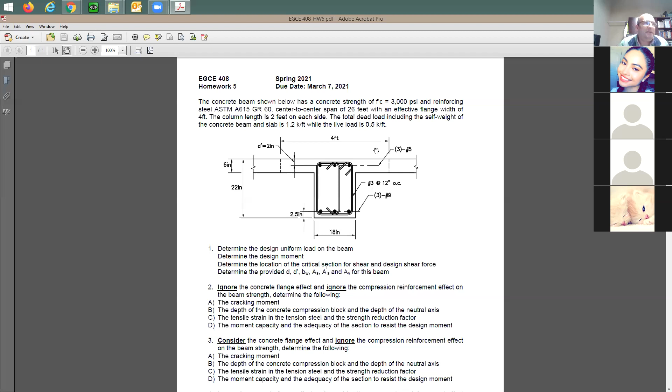So you have given a beam, with some information about it. You have the concrete strength, and the reinforcing grade, which means Fy is going to be 60. You have center to center span, and then they say effective flange width is going to be 4 feet. So my understanding is this is going to be like a T section with 4 feet flange. I know the slab is going to be extended, it's going to be 6 inch thick, but I'm going to consider only 4 feet for the flange width.

It says the column length is 2 feet on each side. Now this reminds me of the shear slide set, so let me put it on. This could be helpful to understand what this is about.

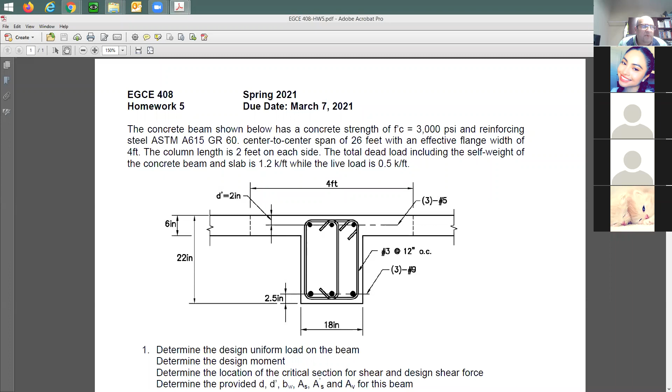You guys know if I just said the span is 26, it's going to be center to center, not the clear span. Just to clarify here, clear span versus total span—you guys have seen this.

So it's true that shear design itself won't be on the exam, but you need to understand this. You need to understand that the clear span is from face of column to face of column. The center line to center line span is from center of support to center of support. Are we clear on this? Yes? Okay, good.

So when you do the moment diagram, when you do the shear diagram, you do it for the center to center span. But when you compute the shear demand, you take it at the distance from face of support of the clear span.

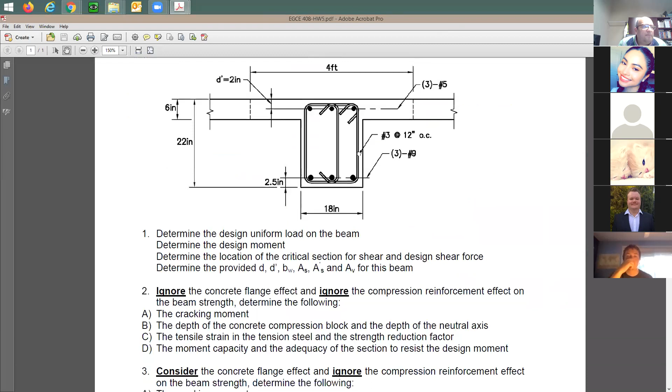So the thing I'm going to take from the shear design is the following item. For this problem, it says determine the design uniform load. What's the design uniform load? Is this dead load or live load, or W ultimate, which one? Dead load? Just dead load? Is it design load? That'd be off, isn't it? This is going to be the ultimate load, correct? Yes, ultimate load is the same as design load, same as demand.

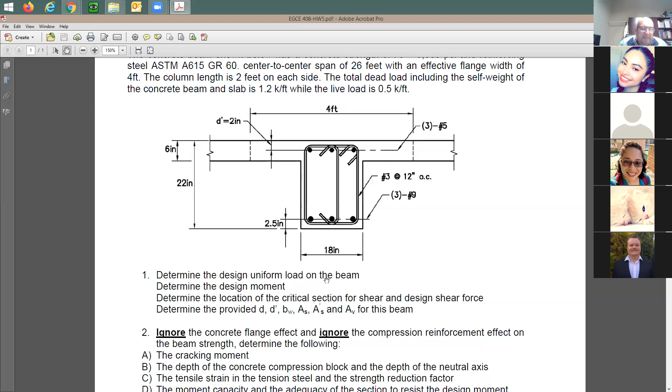So I'm going to put this here. So I'm going to say this is going to be W ultimate, which is the same as design load, which is the same as ultimate load.

How many equations do I need when it comes to load combinations? I'm going to say when I have dead load and live load, because it says here dead load including the self weight, which means do not redo the self weight. If I say total load including the self weight, do not redo it—it's already included. Unless I say dead load does not include the self weight, in which case you need to calculate it.

Just the live load first, two—oh sorry, just the first two load combinations typically. Yeah, exactly: 1.4 dead versus 1.2 dead plus 1.6 live. This is what you need to consider.

Where do you get the dead load and live load from? I'm going to say from here, it's going to be given to you. Do you need to do the self weight of the beam in this homework? No, you don't need to. But if I said total dead load excluding the self weight of the concrete beam and the slab, it means you need to figure out the weight of this concrete element. If I said including, you don't need to.

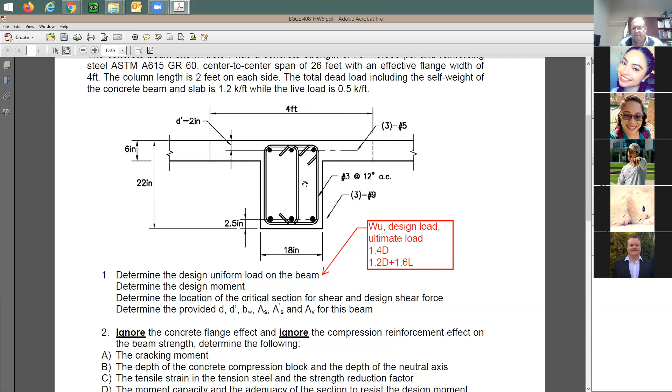Here's the first item. How about the design moment? Is this a simply supported beam or a continuous beam?

Continuous. How do you know it's continuous? The diagram of the T-beam that has that. Which diagram? This section of the T-beam? I'm talking about this beam itself. It goes from one column to another column, right? So when I draw this, I'm not drawing the slab, I'm drawing this beam. So the center line of this beam is going to be along this way, right? Here's one support, and here's the other support.

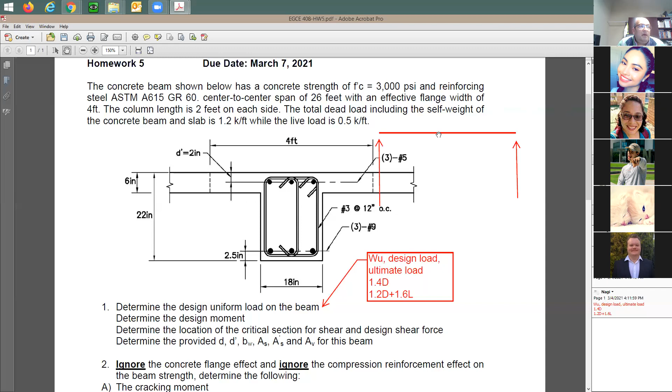This is what you call a simply supported beam. Unless, it says here's going to be 26 feet for the span, which means from here to there is going to be 26 feet.

Unless I come here and say it's going to be a continuous beam, and then I give you more than one support, it means it's going to be continuous, and then you need to use the moment diagram. Does it say here's going to be continuous? Is there any referencing to the term continuous, or is there none? No. So it's going to be simply supported.

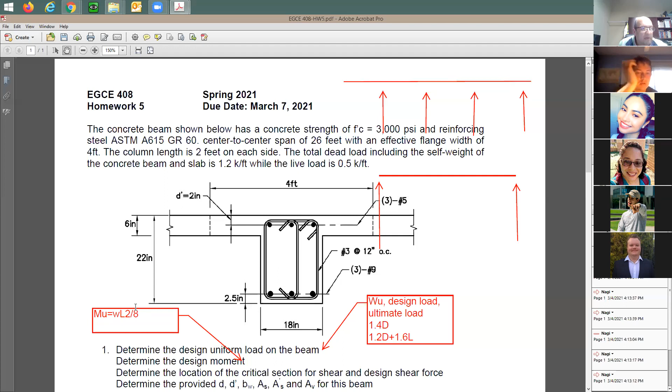Do you know the equation for the moment for the simply supported beam? How much is going to be the maximum moment here? Anyone know this? Are you talking about WL squared over 8? Yeah. Okay good, you're done here with the design moment, which is also called the ultimate moment, or the moment demand.

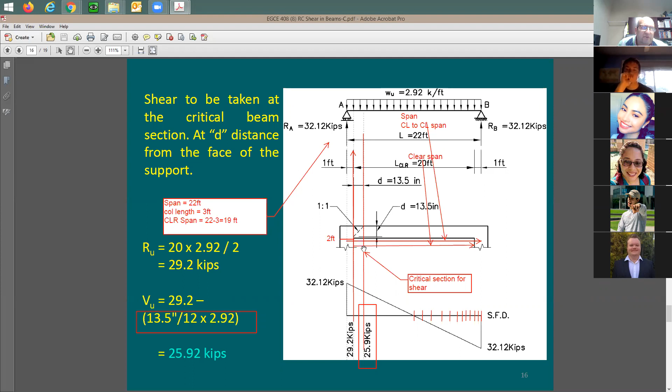How about the location for the critical section for shear and the design shear force? What is that about? The only thing I'm going to be asking about is two things from the shear slide set. How would you find out this design shear? You guys know how to do this? This is going to be structure analysis, pure structure analysis, which means you need to find out the clear span, do the moment diagram, do the shear diagram, find out the moment at the critical section for shear. So you need to indicate where that critical section of shear is and how much is the design shear force, which means V sub U.

Can you find out the depth? Can someone tell me the depth when you have positive moment? How much is the depth here? 19.5. Okay, did you do the bar diameter and the tie size and things like this, or you don't need to? No, it already gives us 2.5. Okay good, so it's going to be from here to there, right?

Okay good, how about BW and D prime? What is D prime? How much is D prime? 2 inches? 2.5. Yeah, it's right there. I mean, this is here. The first problem is going to be so simple. This is basic information, basic knowledge. If you cannot read this problem, if you cannot understand the given information, you're not going to be performing here. So this is like the basic thing.

How about BW? Where's the width of the beam? 18 inches? 18, 4 feet or 18 inch? 18, 18 inch, okay. How about AS? Is it the top or bottom reinforcing? Is it 3? Bottom, bottom. The bottom, 3 times A sub number 9, for number 9. Okay, how about AS prime? 3 times number 5, you need to find out the cross-section area for number 5, which is 0.31, right?

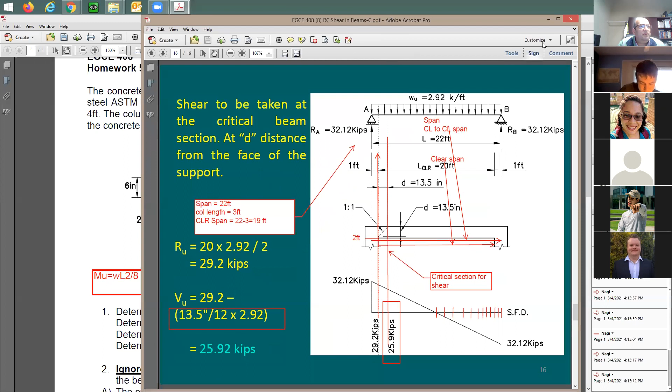How about AV? We discussed this AV in detail here. We talked about it enough times, I've been asked a question about it, I repeated a couple times. You remember this AV? We're going to do here a cut through the ties. So let me do here a cut through the ties. How many ties is the cut through? 3. 3. How about cross-section area for number 3? It's 0.11 times 3, and with that you are going to have your AV.

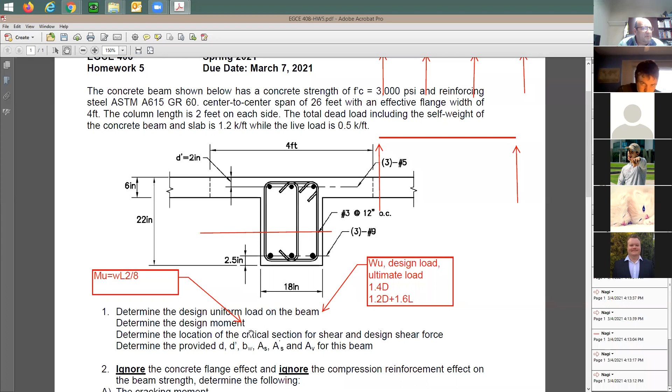All right, done. Problem number 2. You got to be careful here, very careful. It says ignore the concrete flange effect. What does it mean by ignore the concrete flange effect? It means consider your beam to be like this, don't worry about the flange, don't consider it in your analysis. Just take this piece and the reinforcing and start to do your business. It also says ignore the compression reinforcing, which means just ignore this 3 number 5. They're not there.

And then solve the problem. What does it mean, find out the cracking moment? We have done the cracking moment before many times. Does it mean that you need to do it with the flexure formula or with the force method?

Through the flexure formula. Why? We're looking at the behavior of concrete. So why not the force, the couple method?

Which one is easier for you? The flexure formula, right, Sarah? All right, if this is faster, just do it, because I did not specify here which method to use. So it's gonna be up to you. If you want to do the force method, you do it, or the couple method, you do it. If you'd like to do the flexure formula, you do it. It's gonna be up to you. If I'm not specific here on which method, just do the easier method for you.

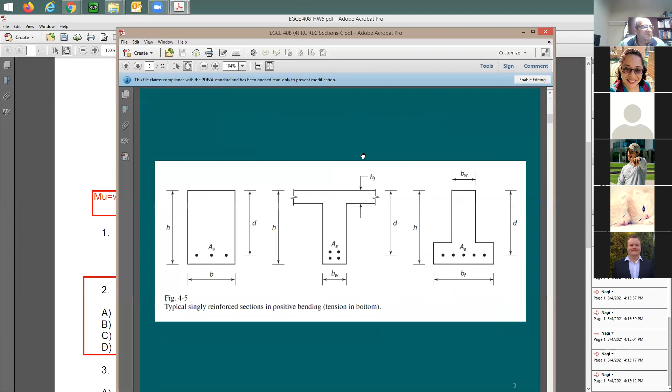We'll define this. Yes, okay, let's go here to the rectangular section, design and analysis. And this gives you the one. Yes, okay, this gives you this section here. Just use this formula. You want good examples right here. Rectangular section, compression reinforcing is not used. You can say slide set number 4.

So slide set number 4 is going to cover this problem. Any questions? No. Right, number 3. It says here, consider the concrete flange effect.

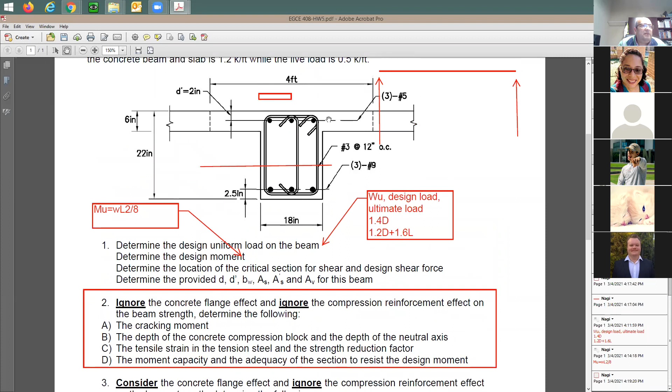What does it mean by that? It means treat this beam now as a T section and don't worry about the compression reinforcing. It says, consider the concrete flange effect, which means treat this as a T beam and ignore the compression reinforcement. No compression steel here. Don't take it into account.

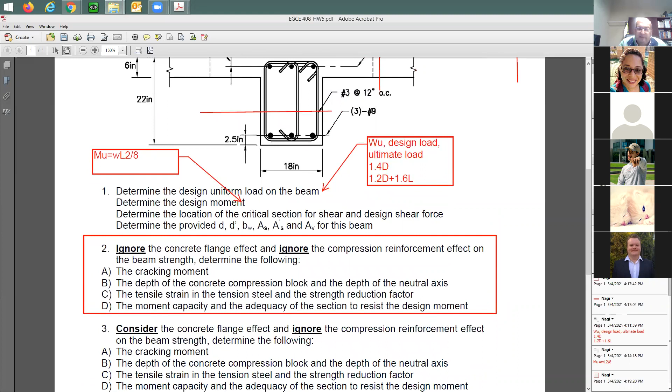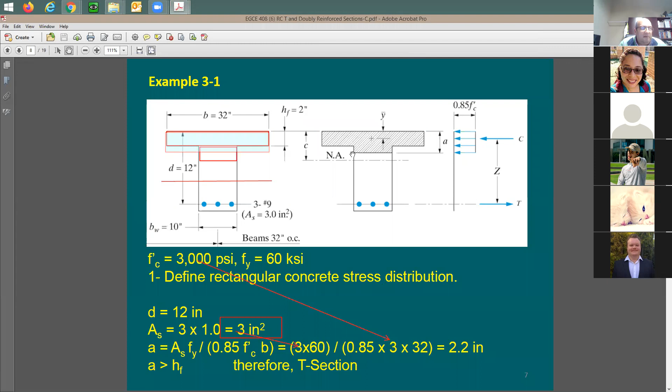I'm going to say, where should I go? Which slide set is this? Let me look at this slide set. So, okay, yeah, this slide is example 3.1. Exactly. This example 3.1, slide set number 6. So this is gonna be here, slide set number 6. You're gonna repeat exactly what you have done here, but it's gonna be exactly the same steps.

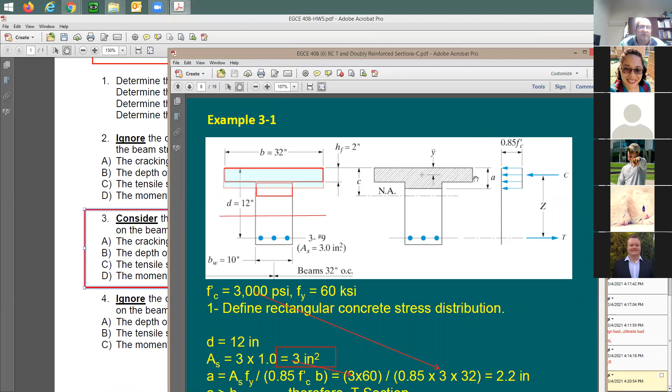Cracking moment for a T section, right? And then you do compression block depth. And if it falls within the flange thickness, you're gonna say now it's gonna be a rectangular section. If it's given the flange in the web, you're gonna say now this gonna be a T section, and you just follow this example that we went through already. Yeah, very good solved example. Any questions on number 3?

No. Okay, so it is very clear here. Here it says ignore the T section effect and ignore the compression reinforcement. Here, consider the flange effect, which means treat it as a T section and ignore the compression reinforcing. So great. How about the last one?

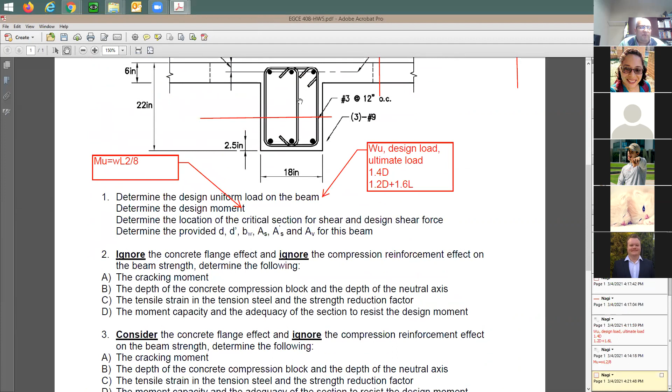So okay, last one. It says it is gonna be a rectangular section with compression reinforcement. So actually all numbers gonna be the same. So once you find out D, you find B, and all of these numbers, you can just use them. And AS and AS prime is gonna be the same. So in here, you're gonna treat it as a rectangular section, just like this, right? It's gonna be this rectangular section, no T, and use the top and bottom reinforcement. You need to use both of them.

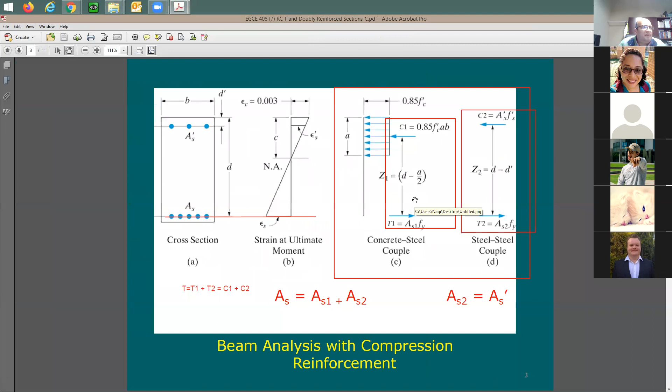Now, where should I go? Which slide set? Okay, so okay, slide set. I'm looking for this compression reinforcement, rectangular section, not a T section. I'm gonna say, here we go. This gonna be slide set number 7. You have detailed example on it.

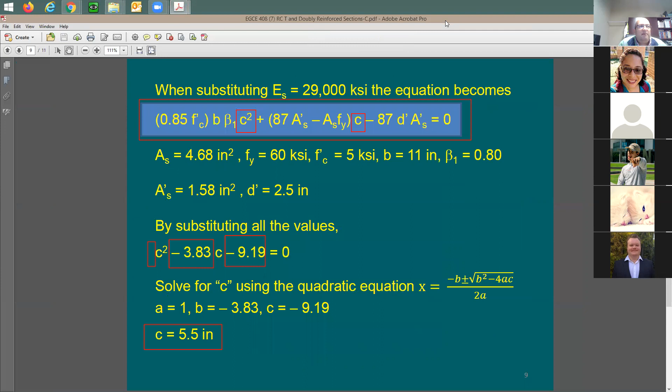But in here, I don't really need the cracking moment again, because cracking moment, you're gonna do it once for this rectangular section and once for this T section. Again, your ultimate goal is to find out M nominal, but you need to go through the three steps. Any questions?

Thanks, Eddie. Yes, any questions? Because I'm done for today. This is it? That's it? Yeah.

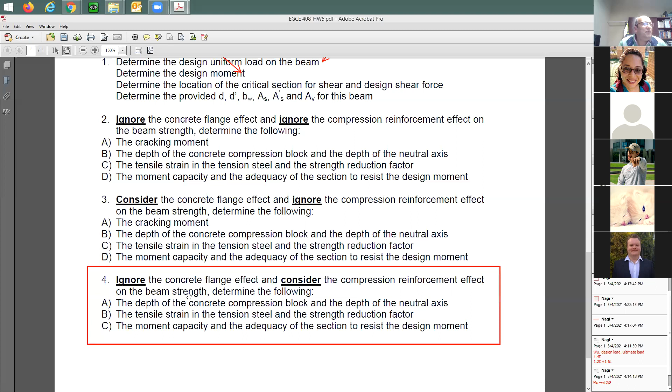So is this how our exam is going to look like? Like something like this? Yeah, something like this. And so in some way you feel that, hey, now I know how the exam is gonna look like, but actually this is everything you have studied so far in this semester. We have studied rectangular section with cracking. I'm gonna say where this is covered. I'm gonna say, yeah, it's gonna be right here.

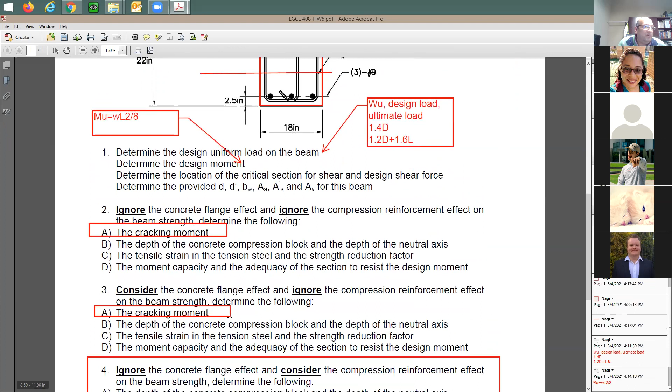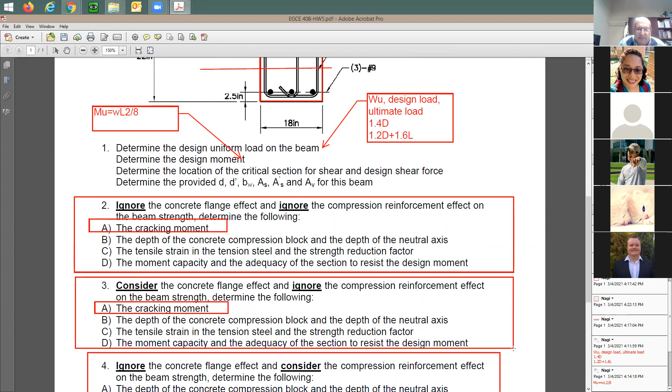We have studied T section with cracking, and you can use any equation you wanted, which is right here. We have done the rectangular section, and then we need to figure out all of these parameters, and here's the rectangular section analysis. Which slide set is this? You can say slide set 4. Okay. We have also done this T section with no compression reinforcement. This gives you slide 6. We have done also this in slide set number 7. So we covered here everything you have studied in terms of flexure, and we didn't touch the shear yet.

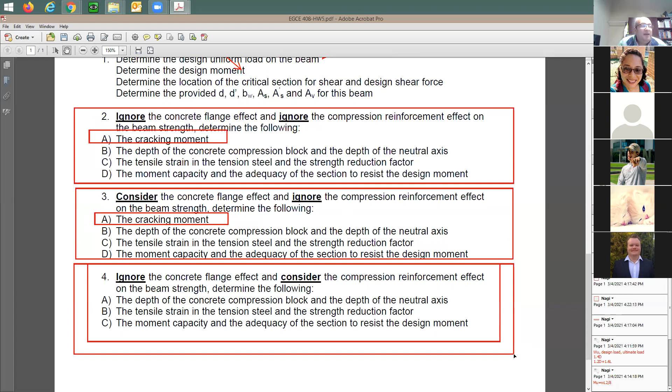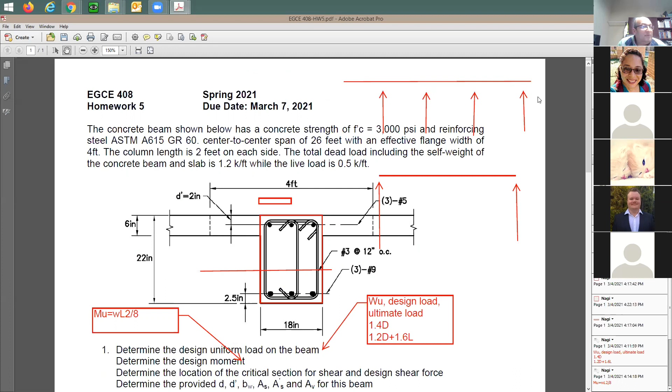Now, it is your chance to ask me before the exam. Now you have this homework that you need to practice. Be sure that you do it a couple of times. You understand every single word that I put there. Will you be posting this solution after the due date? After this due date? No, because you have the solution right here. If you like to see the solution, it's gonna be right here in these slide sets. Let me put this again, okay.

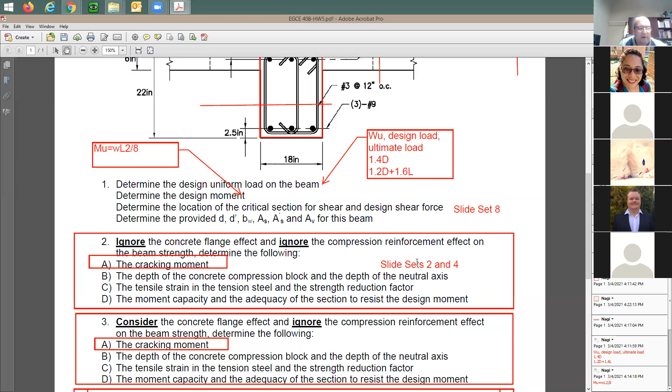This section here about the shear, I'm gonna say slide set 8. So I'm gonna put here slide set 8. Let me put it here. You have the method. You know exactly how to do this. How about this rectangular section? Where is this at? First, it's gonna be uncracked, which is slide set 2. So you say here slide sets 2 and what? Can someone help me for the rectangular section? And 4. Am I correct? Yes. Yes. Okay.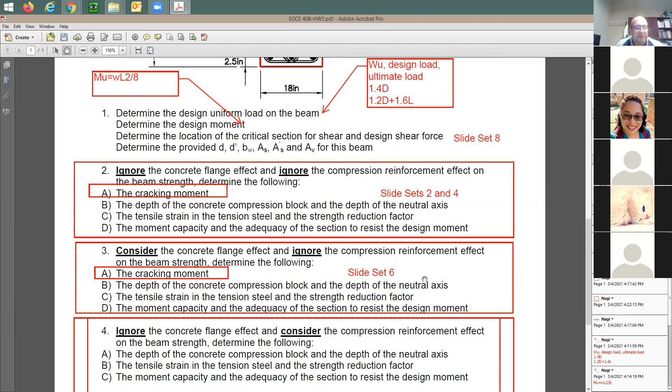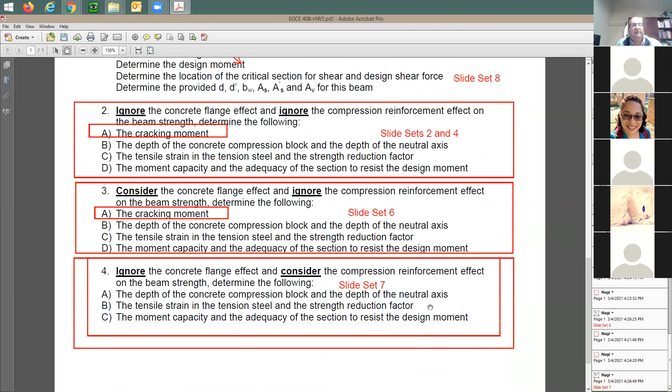How about this? I'm gonna say this is gonna be for the flange effect. Which slide set is this? 3. 6. It's gonna be 6, right? Each one of the slide sets, you're gonna see detailed analysis and good examples that you just need to follow. You need to study it very well, try here, and also you have the homework. How about this one here? 7. Excellent. So done. You have this now recorded, right? So you can just open this and look at the slide set, study it, you finish this.

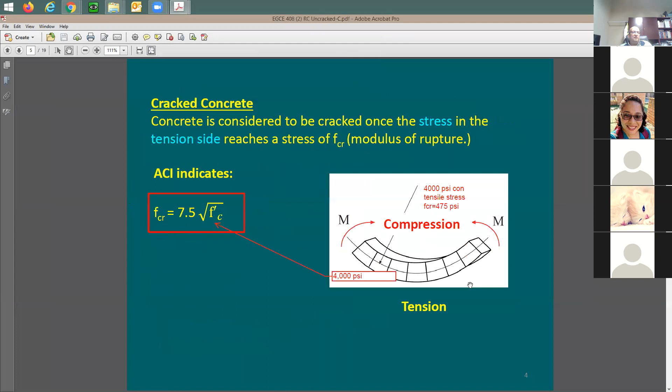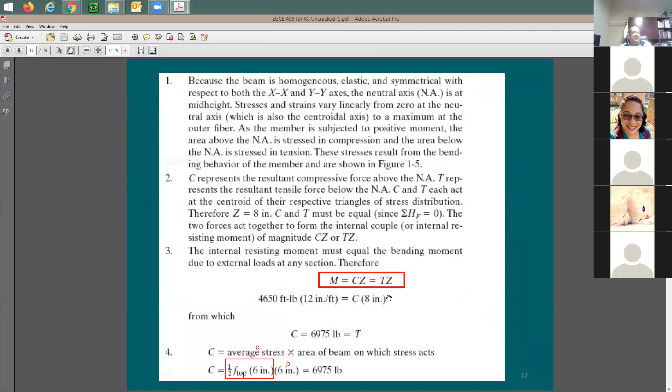This is correct. The cracking moment is the same, yeah. 7.5 square root of f prime c. Uncracked section, this is the way that you do it. Do we have a homework? Yeah, we have a homework for it. Do I really need to use this method? I'm gonna say, no, you don't have to. If you have this method here, it's gonna help you out to do it quick. Why not?

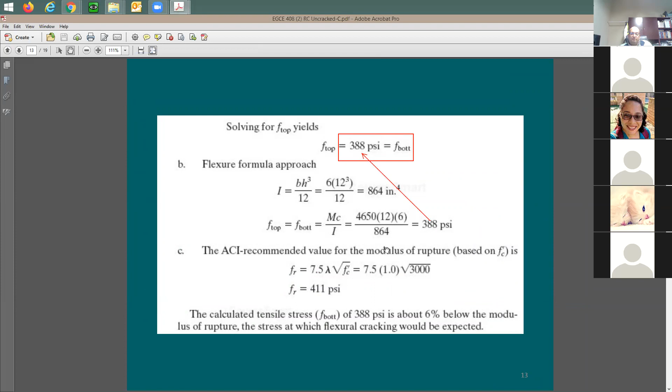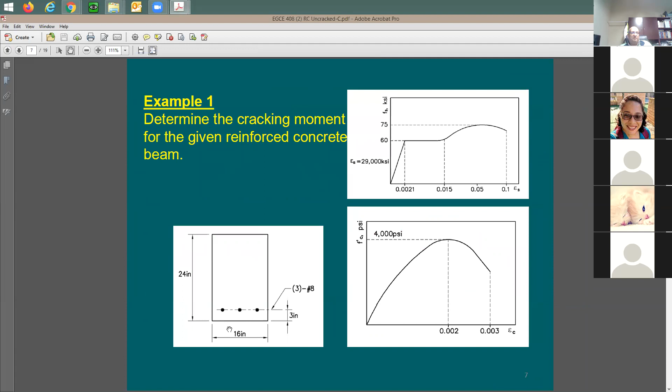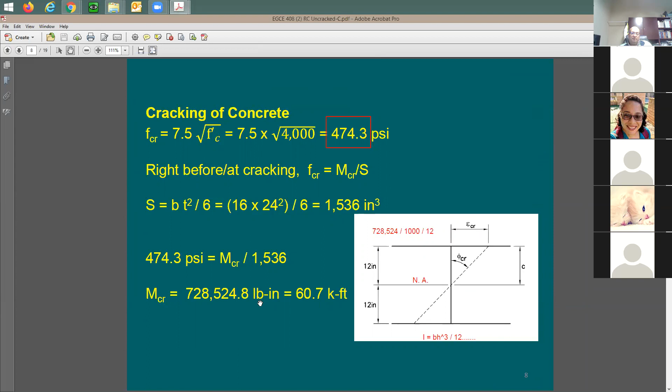So we had for rectangular section, we have also for a T section. Here's the rectangular section. If you want for the first example that you guys have taken, here's that. How long is this gonna take you? Like an hour. Okay. Critical section for shear.

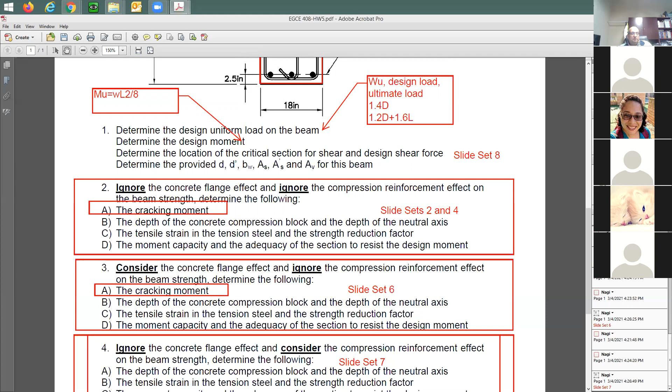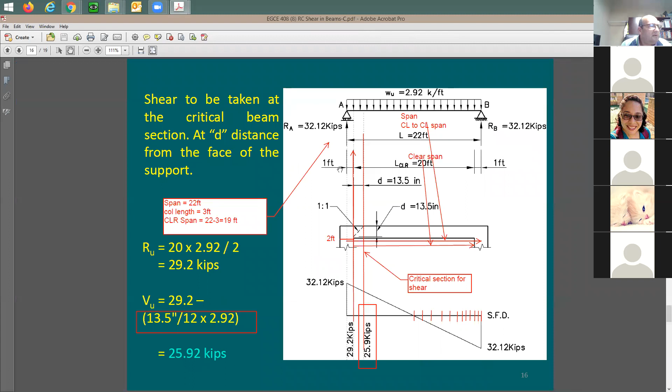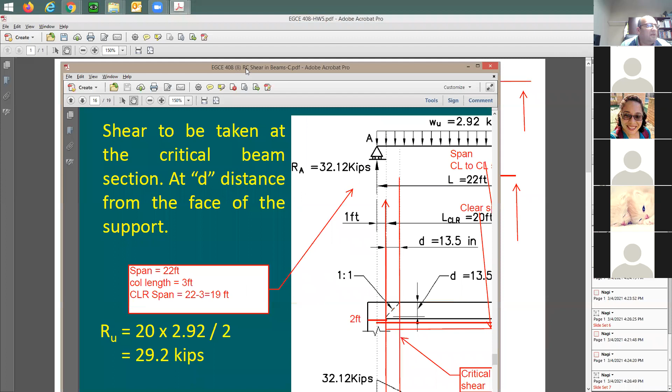Let's say that you have here, based on this, it says center to center span 22 feet. How big is the column size? Do you guys know the column size in this case? It says here 2 feet. How do I know it's going to be 2 feet? Because from the center of the support, I'm going to have a foot right and a foot to the left. So in here, it says the same thing. It says center to center span 26 feet, and the column is going to be 2 feet. Let me look at this. So in this case, this is going to be 26. It's going to be the same 2 feet.

So in our homework, if I may write here, I'm going to say L center to center is 26 feet. And L clear is going to be equal to 26 feet minus 2 feet. Why didn't it say minus 4 feet? Can someone help me with this? Is it because it's centered? Yeah, because this is going to be right in the center. This beam is centered on the column. So when you do the moment diagram, it's going to be based off the center to center span.

When you do the shear, it's going to be based on the clear span. And then you're going to be also going d distance away from face of support. So if this is going to be face of support, you need to go d distance to find out the shear. In your case here, d is going to be equal to, it says here 22 minus 2, it's going to be 20, 19 and a half. So it's going to be 19 and a half.

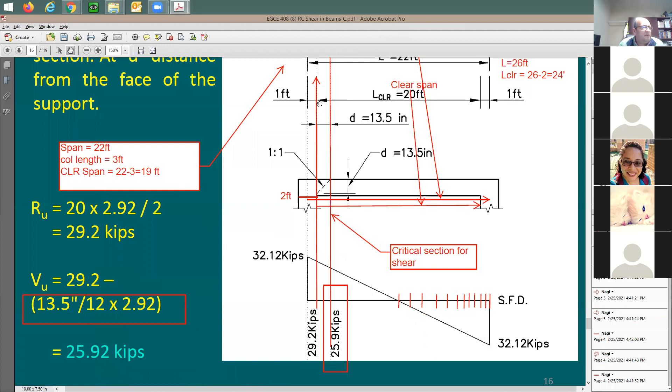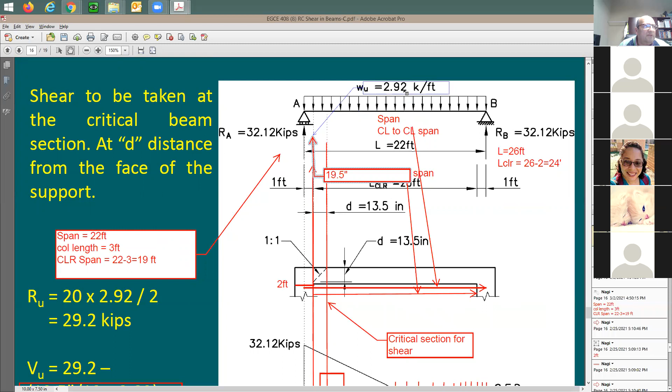So in our case here, you're going to be going here at d distance away from face of support. And this distance is going to be equal to 19 and a half inch. You need to put it also in feet. If you like to do the shear, it's going to be easier if you just do everything here in feet. So this little distance, this is going to be 19 and a half inch.

After that, you need to find out the shear at this location. So critical section for shear, again, just try to memorize it this way, is going to be at d distance away from face of support. So I'm going to say critical section for shear at d distance from face of support.

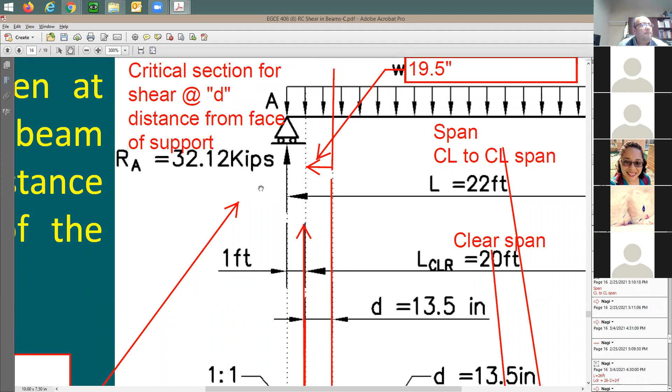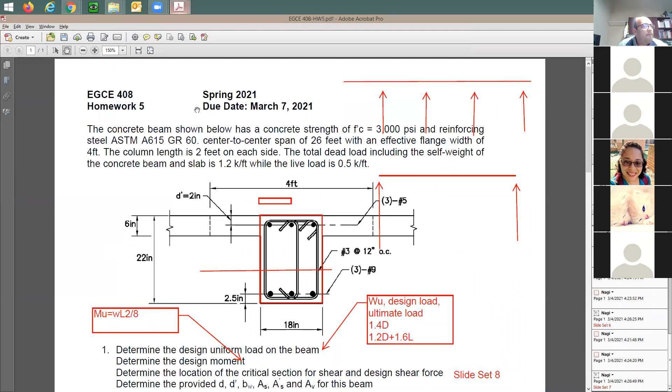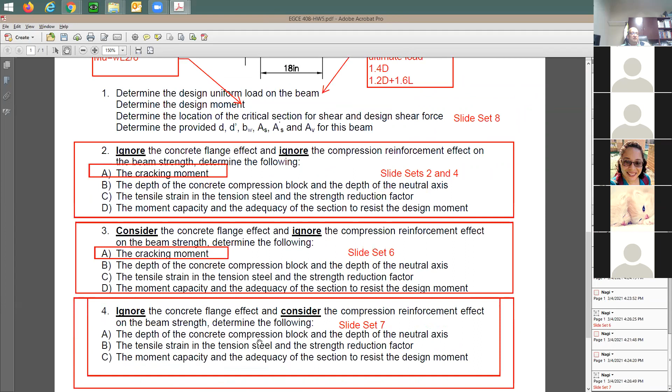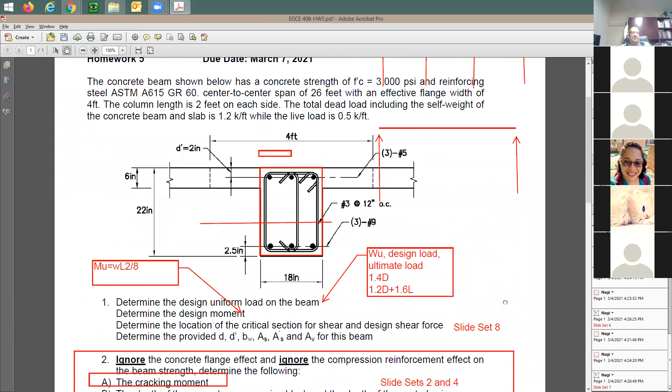All right. Any discussion here about minimum steel? Did you guys see anything about minimum shear steel? Minimum flexure steel? Is it here? Did you guys see it? Yes, no? No? Okay. So does that mean it's going to be in the exam or not? No, it won't be. Okay, all right, great. Just want to be sure that we're on the same page.

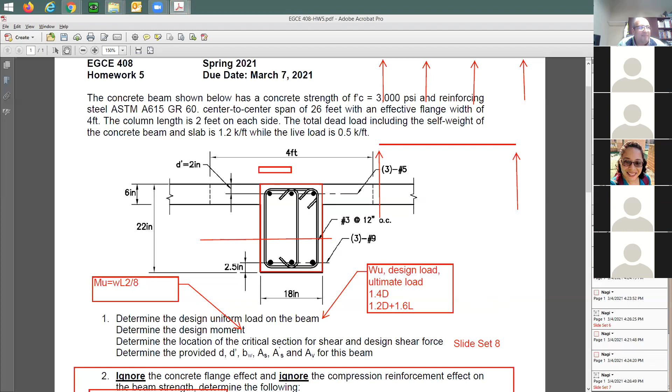So Professor, whatever is not on the formula sheet won't be on the exam? Well, it depends. For example, let me open the formula sheet. If you're talking about equations, you're right. But if you're talking about ideas, no. No, yeah, just equation. Yeah, just equation. Yes, Eddie, it is my job.

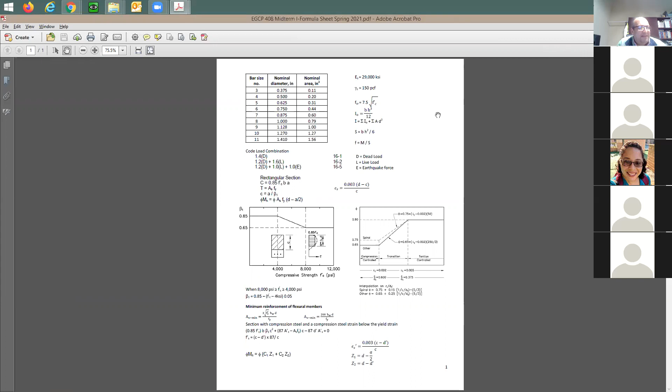Okay. So you guys see here the minimum reinforcement for the flexure members, right? So you have it. If you have it in the exam, go ahead and use it. But I didn't mention it in this practice homework. It is not there. So it's gonna be up to you. You'd like to study it anyways? Yeah, why not? How would you study this? I mean, it's so simple. You have one simple equation here. Here's the second: 3 square root of f prime c, bw times d divided by f sub y. What do you want to study about this? Just take the values and try this As minimum, just in case. So you have all the information you need in this sheet, besides your understanding.

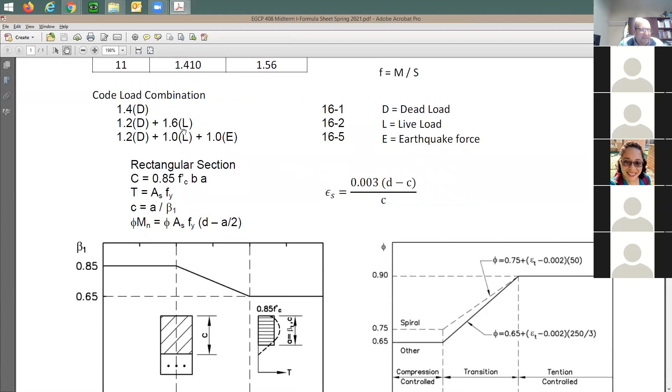Yes, if you use any of these equations, everything should be in psi. Unless you know what you're doing and you're very careful, and then in this case you can do ksi. So f prime c, fy is gonna be all in psi.

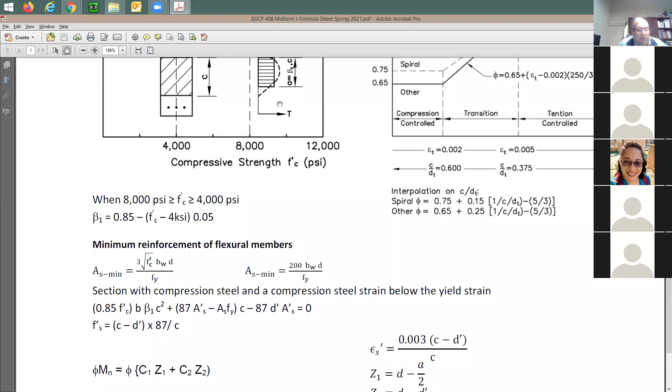Now question, just curiosity here. Within this exercise, you see anything that we didn't cover so far in this semester, in the 408? Anything that we didn't cover yet? We covered everything. Okay. Do you see anything that we did not cover? So, I mean, yeah, okay. Have we covered anything that's not in here?

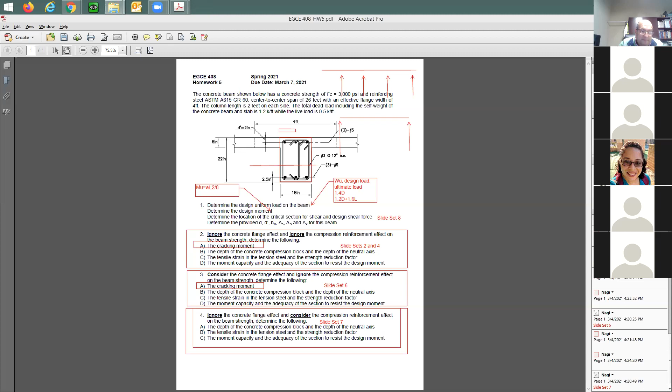This is correct. For the minimum, you need to do both equations and then you take the greater of the two, or the largest of the two. We don't really need the conceptual questions in this midterm. They're not gonna be there.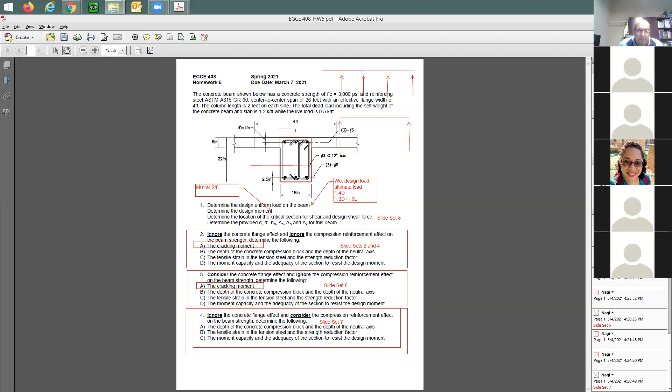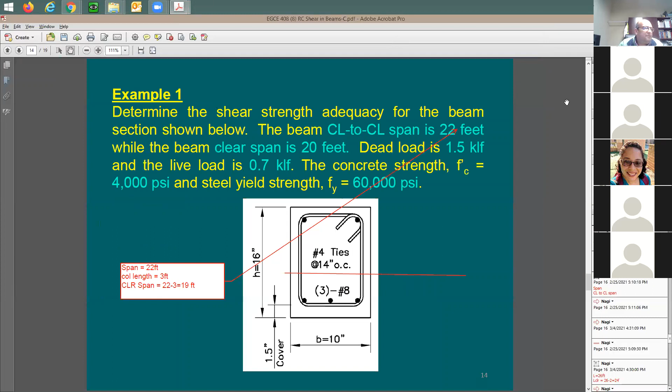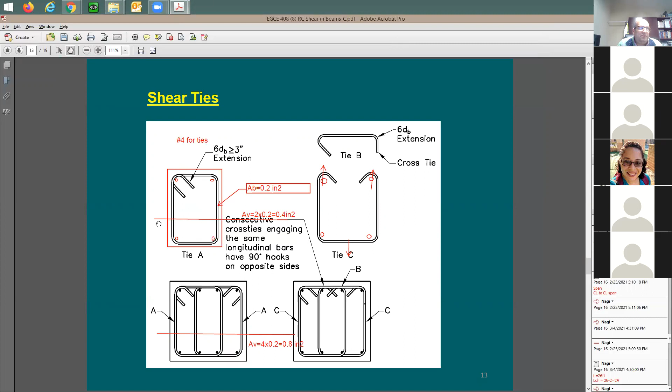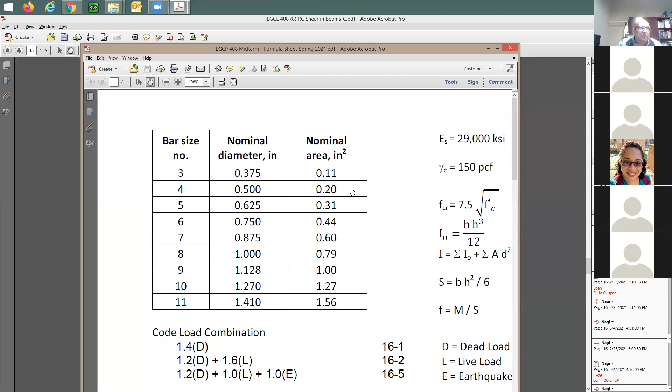Okay, Av is recorded in the previous lecture, and just so you know what you need to do, let's say here's one example where you have number 4 ties, you cut a section, and then you see how many bars you're cutting through. In this case, you're cutting through 2 rebars. For number 4, the cross-section area is gonna be 0.2 square inch. I have it right here. Number 4 is gonna be 0.2. Don't work with this, this is just the diameter, right? So in this case, I have 2 rebars times 0.2, which is 0.4 square inch.

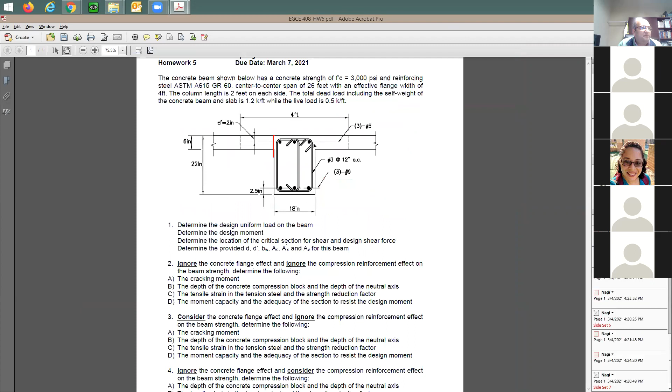Okay, give me another example. Let's do this. I'm gonna be cutting through this section. How many rebars do I cut through? I need your help. 3. 3, all right. What's the cross-section area for number 3 rebar? 0.11. You see here, Av equals 3 times 0.11. All right.